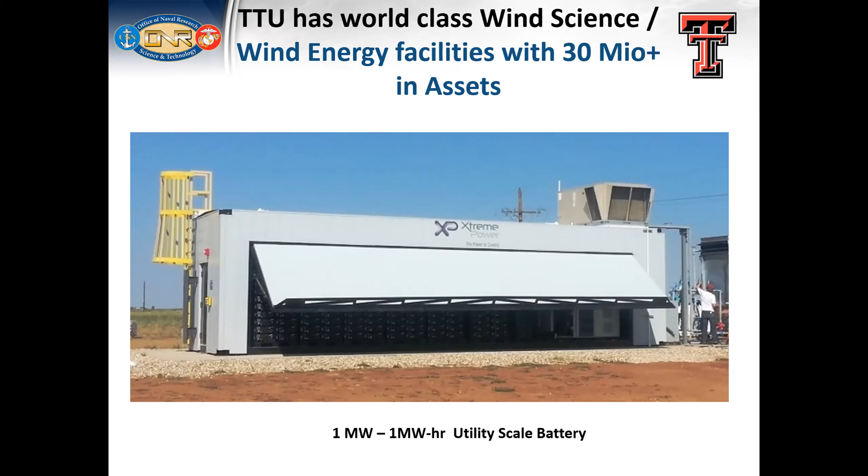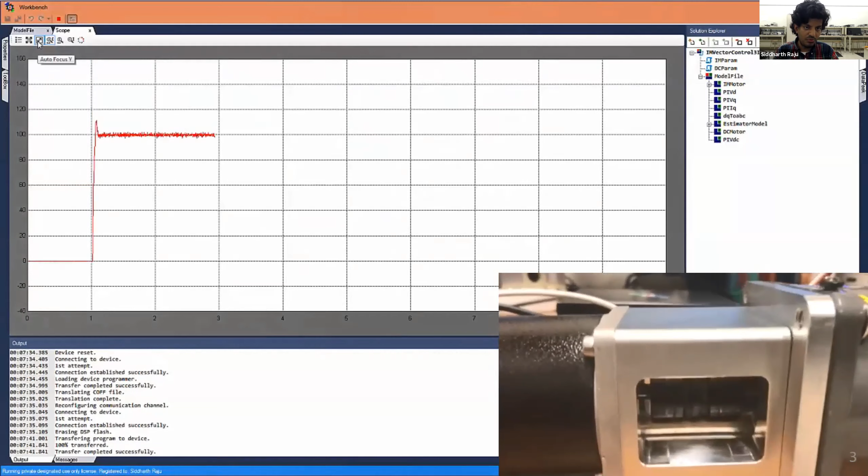So what we plan to achieve at the end of this session is basically to do something like this. Here we have an induction motor model, and we are going to understand the concept behind running an induction motor in vector control, where the speed of the motor remains constant even when a load torque is applied to it.

As you can see here, I apply a load torque and the speed still remains constant at the desired 100 radians per second. So at the end of the session, this is what we want to achieve.

We'll start out doing this for a DC motor, then extend it to an induction motor, and then take it from there to a PMSM motor.

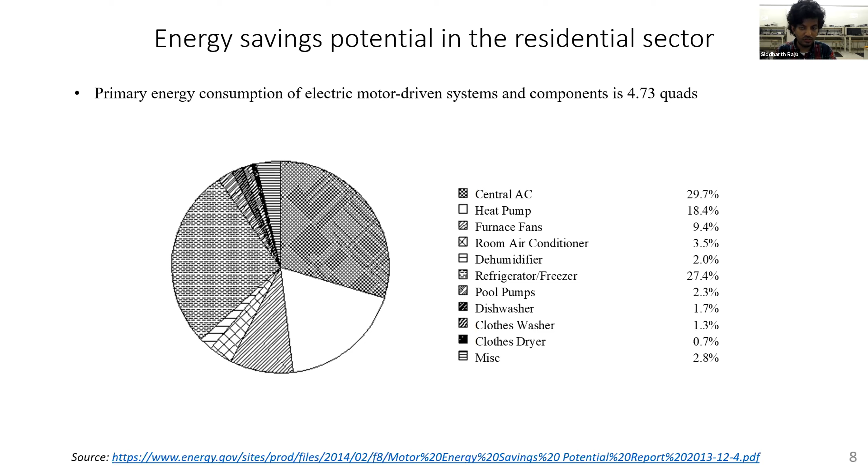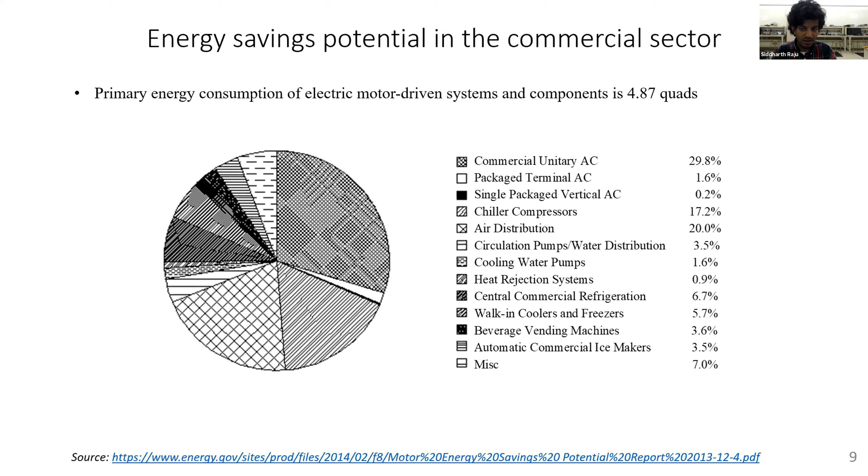Here's a breakdown on the commercial end. Again, most of the expenditure is on air conditioning in the commercial sector. So even a minor reduction in power consumption by using more efficient drives could save a significant amount of energy.

Here are some numbers for how much energy can be saved. If we were to do motor upgrades, going from line driven to electric drives based, as well as making these electric drives more energy efficient, the total energy saved would be about 4% of the energy generated. That's a significant amount of energy saving achievable just by upgrading drives.

There's more motivation to going to drives other than just energy saving. One of the primary motivations is to do precise control—this could be position control, speed control, or torque control—and each of these has its own application.

You would have position control applications in robotic assembly plants, like a car assembly plant, where you want to move a robotic arm from one position to another and then fix some screws and such. You'd have places where you want torque control, like a conveyor belt, where you have some load being added and want to keep propelling it at a constant level of torque, or even in an electric car, where you'd have torque control at lower speeds.

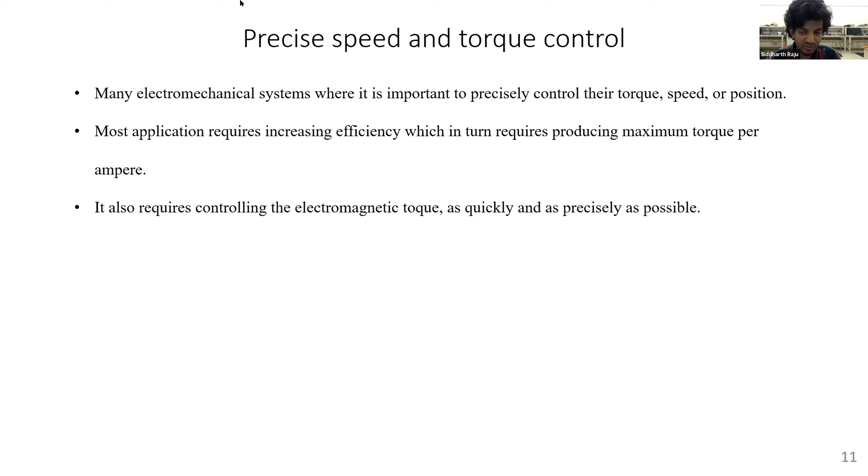Also, if you have more torque, it means you can control your system at a faster rate. For the most part you'll drive your drive at the rated flux condition, so that you can do precise speed control at very fast pace. All of this is dependent on having increased efficiency in your drive.

So what are we trying to achieve by using a drive and speed control? Say you have a conveyor belt and some weight drops on it. Irrespective of what drops on the conveyor belt, you want it to go at a constant speed. At time 0, you add a load, and you want the speed to remain constant. This is the idealized scenario where speed stays constant irrespective of the load applied. In a practical system, the speed would dip a little, but if your controller design is good enough, the speed should catch up and settle back to the desired speed. We try to narrow down the band in which the speed dips

by using a faster and faster response. But this comes at a cost — it would require a higher transient current. We'll look at it in detail as we go, but the ideal response is that you want the speed to remain constant irrespective of what load torque is added to the system.

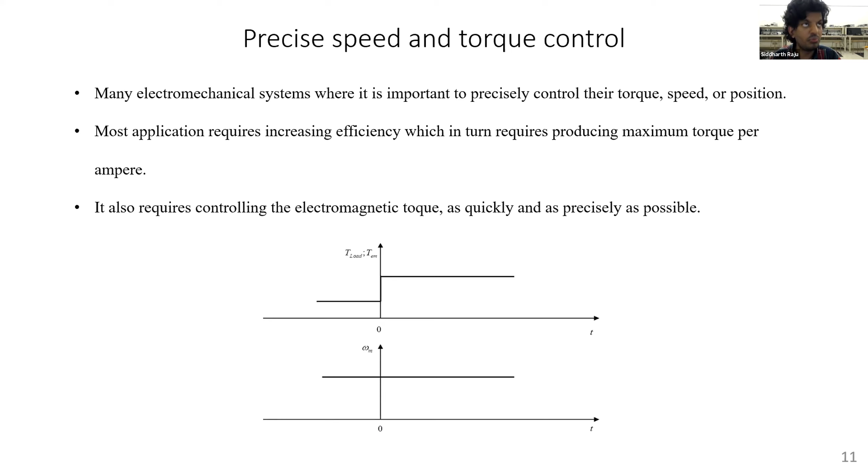Adding this power electronic unit allows us to control what voltage comes out at the output. And that in turn allows us to control the speed of the motor, the position of the motor, or the torque generated by the motor.

There are two basic converters we use to achieve this. In a DC converter, we use a full bridge converter with two legs. Using these two legs, you can make the output voltage go to positive DC bus, 0, or negative DC bus — three combinations. If switch A is connected to the top DC bus and switch B is connected to the bottom DC bus, you get plus VDC. If A is connected to the bottom and B is connected to the top, you get negative VDC. If A and B are both connected to the top, or both connected to the bottom, you get 0 at the output voltage. So those are the three output voltages you can generate.

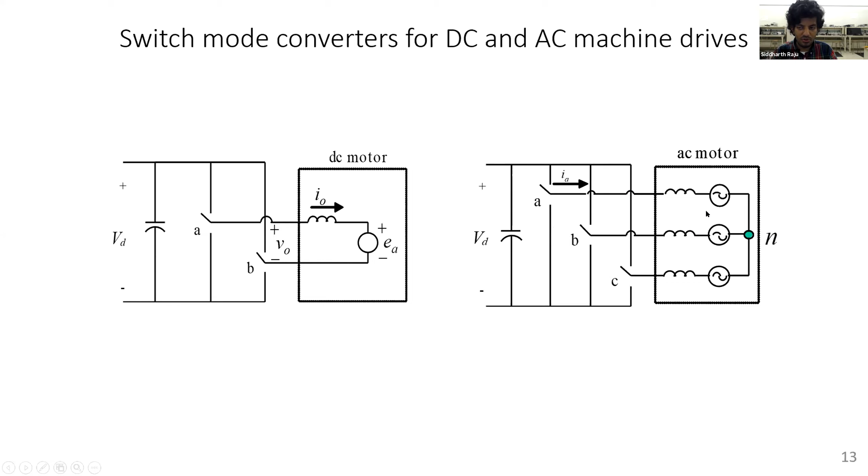Okay, so let's just look at one leg of a converter. You have DC bus voltage, and you control the amount of time the switch is on and off to control the output voltage. So the output voltage at this point is going to be a switched voltage — it's going to be on and off, so it'll be VDC and 0, VDC and 0.

And at the output, if you connect a system equivalent to a low pass filter, 1 by SL plus R, that has a time constant much higher than the switching frequency, then it's just going to see the average voltage rather than the switching voltage. That's what we're trying to achieve by using a power converter — we switch at a very high frequency so the motor only sees the average response, because its time constant is much higher than the switching frequency time constant.

If the control voltage is greater than the triangle, the output is turned on. If the control voltage is lesser than the triangle waveform, the output voltage is turned off. If you look at the average of this on-off waveform, that's your desired output voltage. So you adjust the control voltage to the desired value so that your output voltage average represents whatever is required.

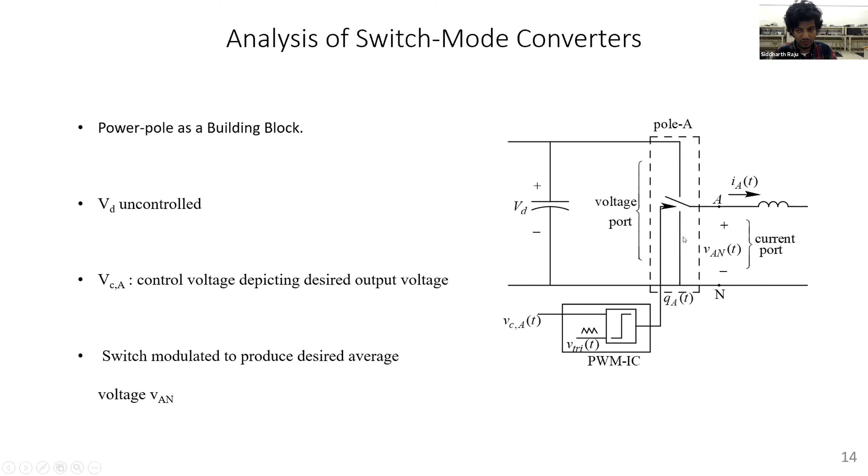From 0 to plus VDC, because we're just using one single leg in this example. So you can have either maximum VDC or 0, in case this is connected to the bottom leg. So with only unipolar voltage, you can control only one direction of a motor.

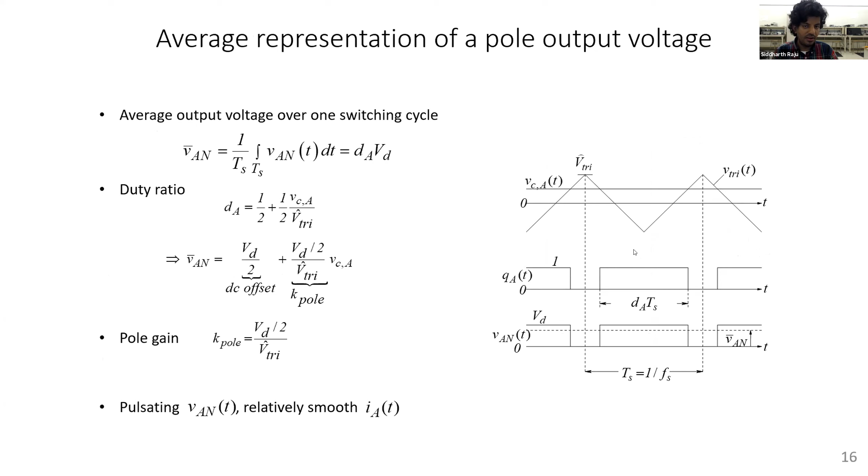So if you have a DC motor and your voltage goes from 0 to say 40 volts, your speed is going to go from 0 to 200 radians per second. To be able to get negative speed as well, or while using positive speed to get braking, you need to apply negative voltage or voltage lower than the back EMF, in which case you need bipolar legs. That's what we achieve here.

So you use 2 legs of an inverter rather than a single leg to get bipolar output voltage. As I mentioned earlier, if you connect the top switch to the positive DC bus and the bottom switch to the negative DC bus, you would get an output voltage of VDC.

And if you flip it around and connect the A phase switch to the bottom leg and the B phase switch to the top leg, you'll get minus VDC. So you get bipolar output voltage.

Similar to the previous case, by modulating this, you'll be able to get different voltages between plus VDC and minus VDC, and the algorithm to do this is shown here. This is a pretty easy derivation, it's not even a derivation, it's just obvious. But if you want more details, you can look at the material on the CUSP website.

The same can be extended to 3-phase sine PWM. You again have the same VDC by 2, and in this case you're looking at it as duty, so it's 0.5. Then you have the control voltage, VC times sine of omega t in phase A, VC times sine of omega t minus 120 degrees in phase B, and minus 240 degrees in phase C. The duty ratio is just varied sinusoidally, phase shifted by 120 degrees, to get the output of the 3-phase inverter.

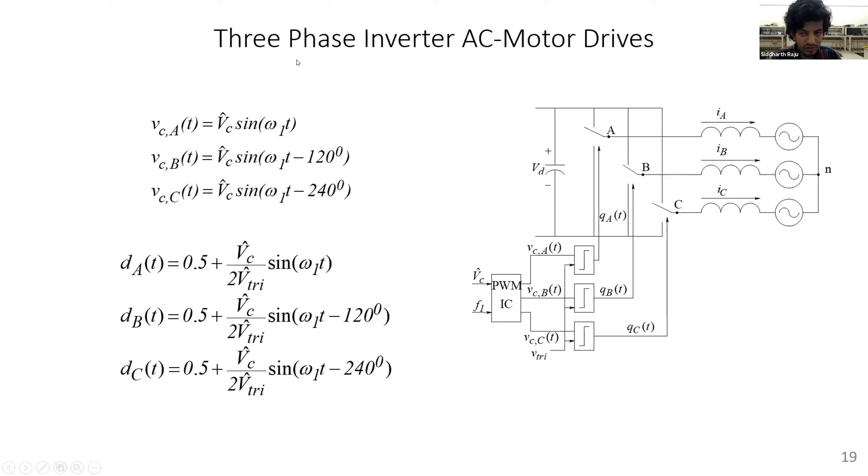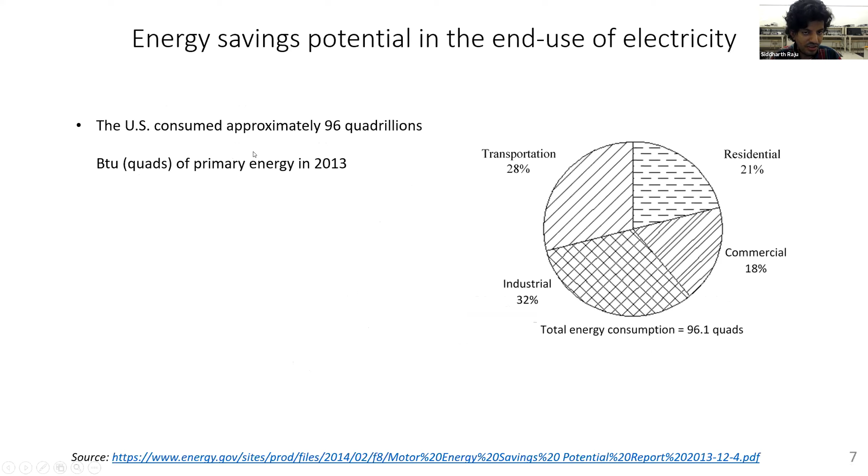This is the overview of the AC 3-phase inverter and the single-phase inverter that we saw. This is one of the first topics covered in part 1 of the advanced electric drives course, so we skipped over the electromagnetics concepts, which is also covered in the course. We looked at the basics of switch mode power electronics, though I just glossed over most of the topic. Now we'll look into the control of electric drives, basically the DC motor drive, in a bit more detail than we did the power electronics.

In a DC motor, it's aligned such that they're always at 90 degrees, which is the point of maximum torque production. By adjusting the applied voltage, you can adjust the magnitude of the flux produced by the electromagnet in the rotor. So adjusting the voltage adjusts the current, which adjusts the flux, which adjusts the magnetic strength of the electromagnet. It's basically two magnets interacting with one another to produce torque.

From an equation point of view, the torque of the DC motor is a function of some kT, which depends on the strength of your stator magnet, times the applied armature current. This kT is just a function of motor design, and we won't worry about the values, for us it's just a constant. So your torque is directly proportional to your current, and your back EMF is going to be proportional to your speed.

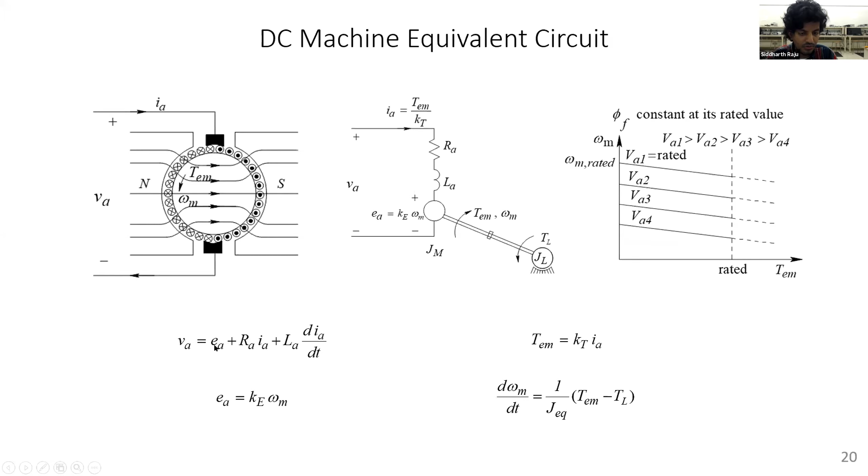The final equation that ties them all together is the relationship between your speed and your torque. The problem with the DC motor is that as you change the applied load, the speed of the motor keeps dropping. The reason is that as I keep increasing the load torque, your current increases, and as your current keeps increasing, your back EMF drops because you have a constant voltage and there's more and more drop across the resistor. That means the back EMF gets reduced, which means your speed drops down.

So let us look at this using a simulation, and do the same thing in hardware as well, just to get an understanding of what happens. These are all part of experiments available on the CUSP website that goes through each and every experiment.

So if you go to resources and basic drives, all of these experiments go through each and every one of them. Here you have motor control where you estimate parameters. The previous experiment is characterization of the DC motor where you estimate the KE, KT, and other parameters, the R, LA, J. Once we have these parameters estimated, we can do speed control as we'll see in this experiment.

Let's go ahead and open and first do a simulation of this model that we just saw. This is very simple: we have an applied voltage minus the back EMF, and then we divide it by 1 over SL plus R, which is the transfer function, RA and LA.

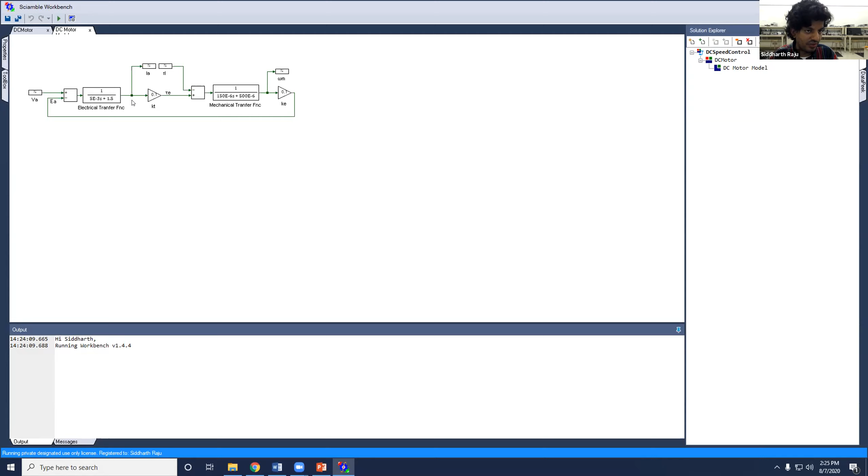So I'm subtracting the applied voltage minus the back EMF. That should give me the drop across the armature inductance and resistance. If I do the 1 by SL plus R, whatever comes as the output is your armature current. And if I scale the armature current by the torque constant, I get the electromagnetic torque.

The electromagnetic torque minus the load torque divided by 1 by SJ plus B gives this transfer function. Here I'm just showing the equation for inertia, and if I add the frictional component, it becomes 1 by SJ plus B. The output of that would be the mechanical speed. If I scale the mechanical speed by the back EMF constant Ke, which equals Kt in SI units, I get the back EMF, and I use that to close the loop. So it's just two transfer functions and a bunch of gain blocks, and I've completed the DC motor model.

Let's go ahead and simulate this model. Before I simulate, at time 0.1 second, I give a step voltage of 10 volts. After that, I start increasing the applied load torque at every second by 0.05 Newton meter, or about 50 millinewton meters. This is a really small lab motor. I'll show you the setup in a couple of minutes. Let's go ahead and simulate the system.

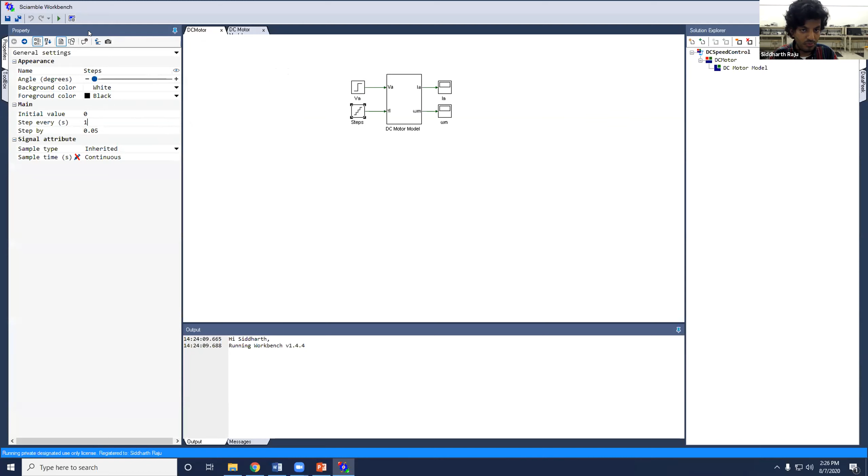At time 0, the speed is close to about 93, around 100 radians per second, because I'm applying 10 volts and your Ke is 0.1. So 10 by 0.1 should be about 100, and accounting for stator drop, it should be a little bit less than 100, and that's what we see here.

At 1 second, I apply 50 millinewton meter and you see the speed drops. Then at the next second, I apply 100 millinewton meter and the speed drops even further, and it keeps dropping linearly for every step, as we see here as well. As the load torque is increased, the speed of the motor keeps dropping.

This becomes a problem if you have, say, an elevator with one person versus ten people in it. If it goes extremely slow at full load and extremely fast with one person standing there, that becomes a problem. Or in a conveyor belt, or a fan, or a motor mixing some liquid, as the viscosity increases, the speed should not change. So if those are the constraints, this kind of open loop speed control, where you just apply some voltage and assume the speed stays constant, becomes problematic.

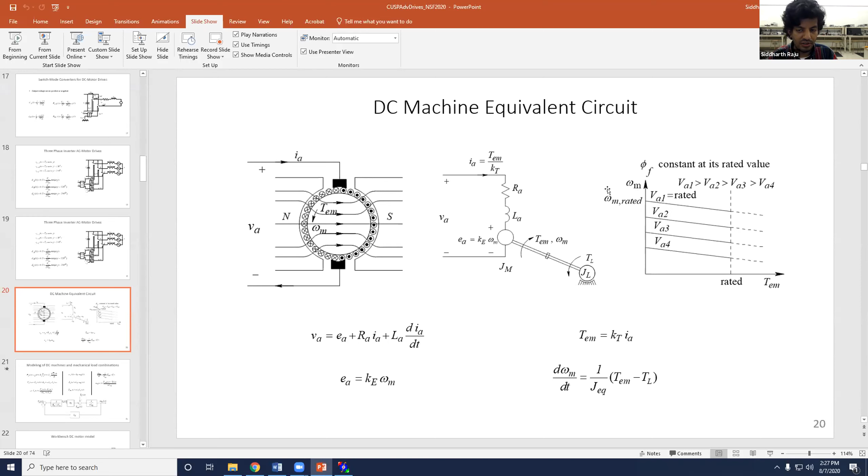So what we want to do is keep the speed constant even though the load keeps changing. But this was just simulation, so let's verify if this is what happens in reality as well. Let's go to DC motor real-time speed control, and let me switch over the video.

My webcam now shows the hardware setup. We have a DC motor on the right, and a DC generator on the left, or a DC motor which basically just acts like a load to emulate a load. The first DC motor, again, I'm setting it at 10 volts. I'm going to run it for some time, and then start adding load to it, and you'll see the speed drop in real time.

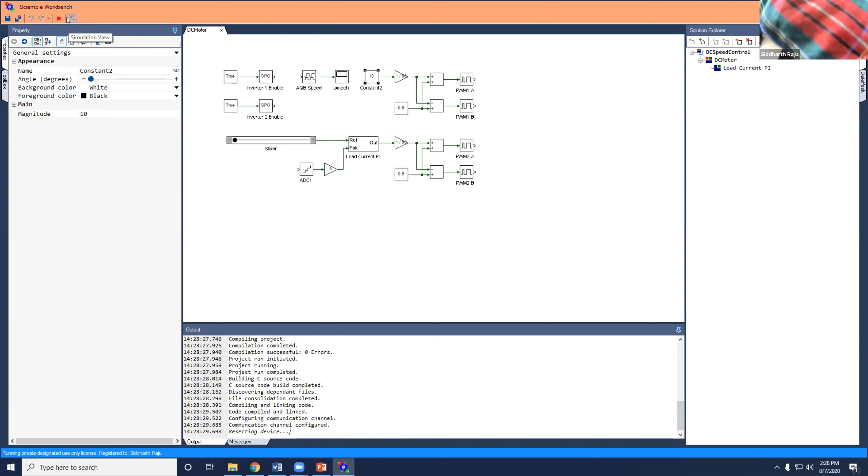Okay, so let's go to real time mode, and let's turn on the power supply.

So the speed is settling at around 90, and it's remaining there. Now let me add a load, and you see the speed just dropped. Let me add one more load step, and the speed drops even further. Let me add 2 more load steps, and you can see the speed drops even further. This is very similar to what we observed in simulation.

Okay, and if I reduce the load, it should go back up again. And if I make it all the way to 0, it should go back to the original speed. So let's stop this.

Okay, so as you can see, the speed keeps changing with the amount of load I applied, and the real-time results are exactly the same as what we got in simulation.

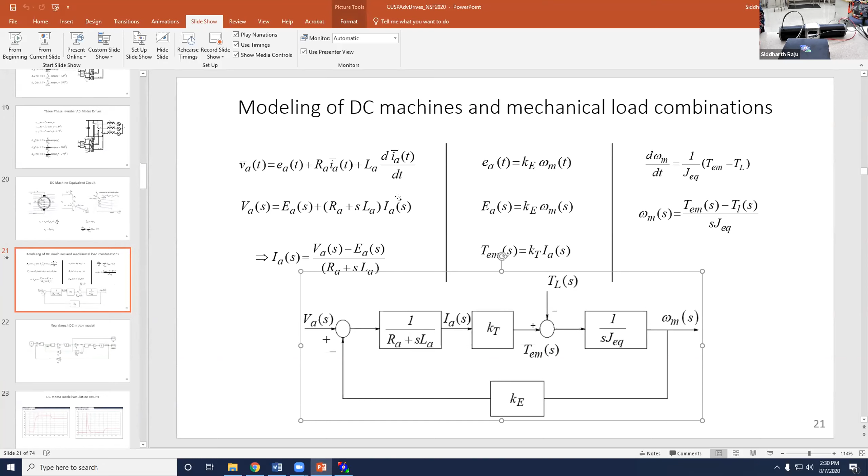So this is the motor model transfer function that I showed you in Workbench before. On the left, you have the electrical equations, electrical model. And on the right, you have the mechanical model equations. And these need to be tied together, and that is tied together by the back EMF and the torque equation.

So you can think of it in a motor as the rotor element, the mechanical aspect, and the stator element - sorry, in the DC motor, the rotor is where we control the power electronics. So the rotor is the electrical component, and you have the rotating component, the mechanical component, and you have those two coupled together by the back EMF and the torque equations. So the flux, the energy in the air gap, is basically what couples from electrical to mechanical.

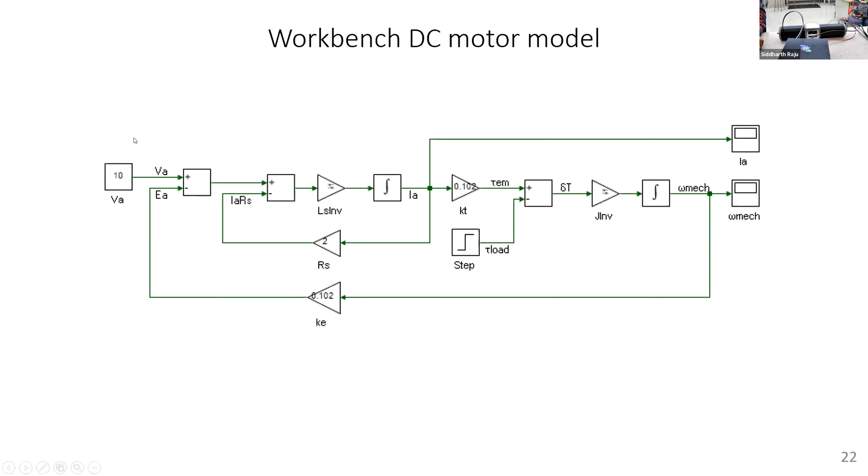So what we want to do is, this is the same model that I just showed you with the back EMF. So this is the electrical model 1 by SL plus R, and this is the 1 by SJ plus B. And this is the whole electrical and mechanical model we just simulated right now. And these are all the simulation results.

So what we want to be able to do is control the speed of the DC motor even when the load torque changes. To do that, we'll be using a PI controller. There are different controllers that are available, and the most simplest and easiest of them is the PI controller.

Even more simpler would be hysteretic, but that's not used in any practical application because of variable switching frequency, which causes a lot of noise issues and EMI issues. So the very minimal basic that we'll be using is a PI controller.

So the PI controller, what it does is if there is an error, say I want some particular speed, 100 radians per second, and the measured speed is say 90 radians per second, it'll take the difference between the two and see that the error is 10 radians per second. So it'll apply some proportional voltage, say 10 volts. And if the error becomes just 5 radians per second, it'll apply 5 volts. As the error keeps reducing, the applied voltage will keep reducing.

And if you just had a P controller alone without an integral component, when the desired speed is equal to the measured speed, the error will become 0. That means the applied voltage will also become 0, which means the speed will start to die down. So we need an integral component which can retain some voltage even when the error goes to 0. So you would need at minimum a proportional as well as an integral controller. So that's the overall control system of the PI controller that we'll be using.

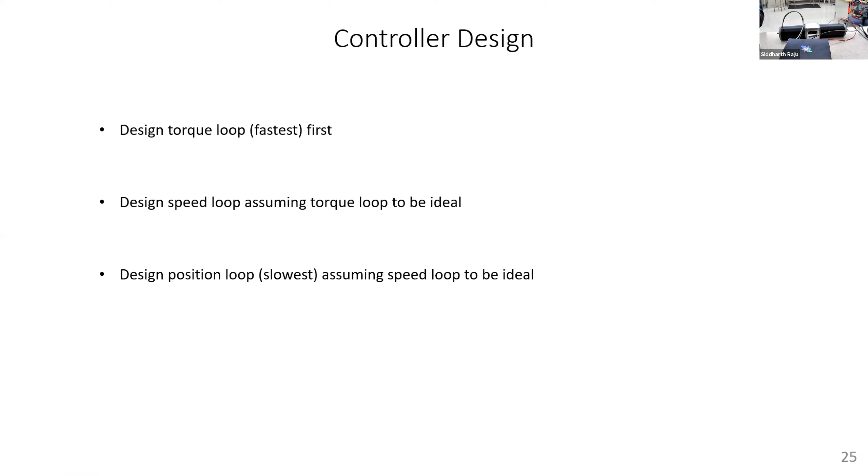You should note though that even with two loops, it does not mean you can control the current independently. It's just a transient control of the current, not the steady state control — steady state is controlled by the outer speed loop. If you want to do position control, you would add one more loop to the speed loop, where the transient speed you can control, but in steady state you can only control the position, not the speed.

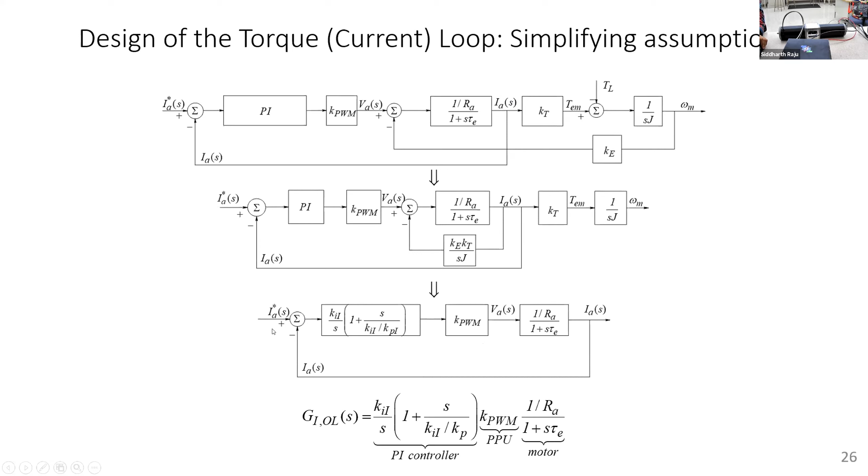So here is the overall structure. I won't go into too much detail since we're running out of time. We have a reference current, and we measure the current, and we have a PI controller which controls the applied voltage so that the measured current equals the reference current. This is the overall transfer function of the system, which can be reduced further and further by just moving these blocks around to the simplified form — the overall transfer function we'd like to tune the KP and KI values for.

So this is a first order system, 1 over sL plus R — just a basic first order system. With a PI controller, you can adjust the phase margin and gain margin of the system to adjust the stability. Usually you would have a phase margin of about 60 degrees.

This is the point where you have just a little bit of underdamped response with a zeta factor around 1 over root 2, which is very close to the ideal value where you'd have minimal error — a minimum squared error function. Basically that means you'd use the minimum amount of energy required to take it from point A to point B of the desired speed or desired current.

So that's the reason we picked this particular phase margin. It could be other values too — 60 degrees might not always be applicable. Say in case of a robotic assembly system, you'd want a higher phase margin because you want your system to be more overdamped, since you don't want your arm swinging around. But if you have an elevator system, if the speed swings a little bit here and there, that's fine — a couple of RPMs — as long as it achieves that speed at the desired time, that should be good enough.

So depending on the application, the phase margin and gain margin you choose would be different, but 60 degrees gets you close to the point of minimal energy required to take it from point A to point B. The open loop bandwidth you'd choose for the PI controller would be at most 1 by 10th of the switching frequency. So if my inverter is switching at say 10 kilohertz, I would design the loop bandwidth to be about 1 kilohertz.

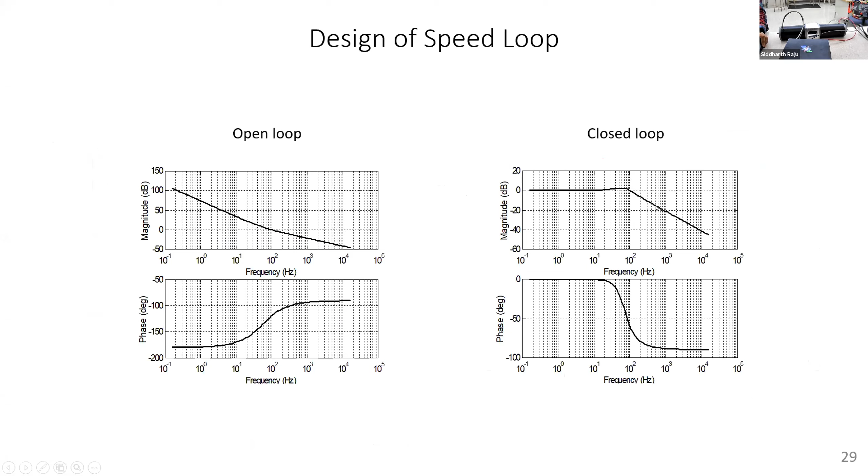So this is the PI controller design. Again, in the closed loop and open loop — without the PI controller and with the PI controller — in closed loop you'd want it to be similar to a first order system, 20 dB per decade.

Okay, so let's go ahead and simulate the system with the PI controller on with the motor model.

Okay, DC motor speed control. So here we have the DC motor model. We have a current control, an inner current controller which is just a simple PI controller, and then an outer speed controller. So let's run the simulation.

As you can see in the simulation, at time 0.1 second, I step a reference speed of 100 radians per second, and it goes to that 100 radians per second as desired. After that, when I apply a load torque of 0.2 Newton meter at 0.6 seconds, the speed drops a little bit, but the controller recovers and pushes back to the desired speed. So this is the simulation.

So this is all achieved by the PI controller. You have an outer speed loop and an inner current loop. This inner current loop is just to limit the maximum current. It can only affect the transient response. You cannot control the steady state current in any way because you have only one control variable.

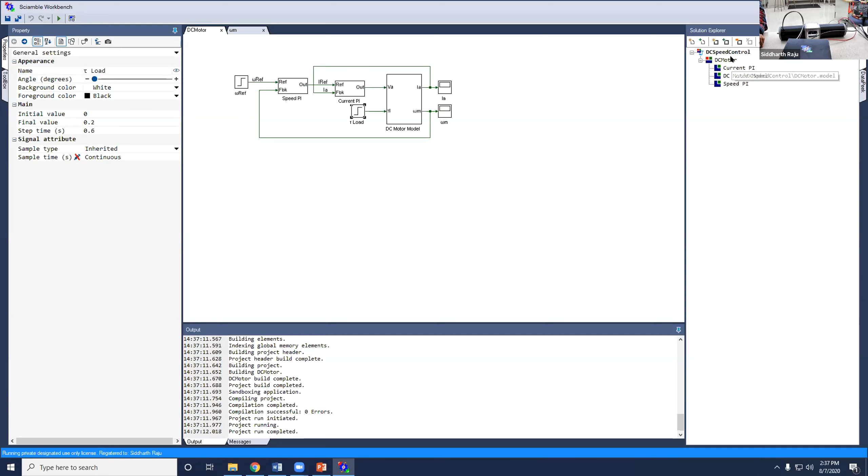Okay, let's do the same thing in real time as well. So as you can see, this is the same system setup. You have a DC motor, but here instead of just doing open loop, you have a closed loop speed controller. And then the bottom is the same.

I'm going to vary the load torque in steps, and see that the speed remains constant. Okay, let's go ahead and run it.

Oops, sorry, I forgot to turn on the power supply. Okay, let's run it again.

Okay, so as you can see, the speed is at 100 radians per second. We'll zoom in and look at the transient response once we stop it.

So let me apply a load torque of 0.05 Newton meter, and you can see the speed dips a little bit, but it's again still the same. Let me apply, say, double the load step. You can see again the speed dips a lot, but it recovers pretty fast.

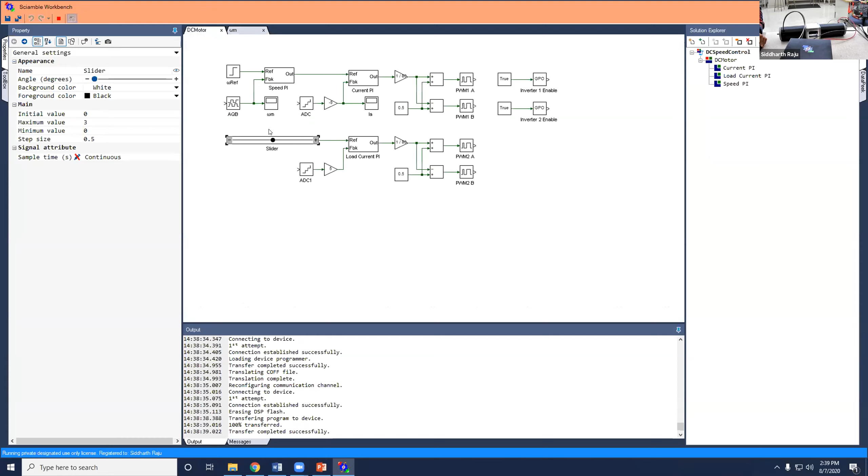And let me apply full load, and you can see, oh, I've reached the overcurrent limit at that value, so the speed is going to go down. But just before the overcurrent limit, if I bring it back up again, you can see the speed remains constant.

So irrespective of what step I apply, as long as I don't exceed the current limit, I should be fine. The inverter will be able to generate the desired current. So as you can see, the speed always remains constant irrespective of the step.

So at time 1 second, I apply the step reference, it goes to 100 and settles down at 100 and remains there. At every other step, as I keep applying load torque, the speed dips a little bit, but it recovers pretty quickly and settles back again. And again, this dip is because the inverter reached overcurrent and went into current limit, but otherwise this wouldn't have happened. Okay, so that is DC motor speed control.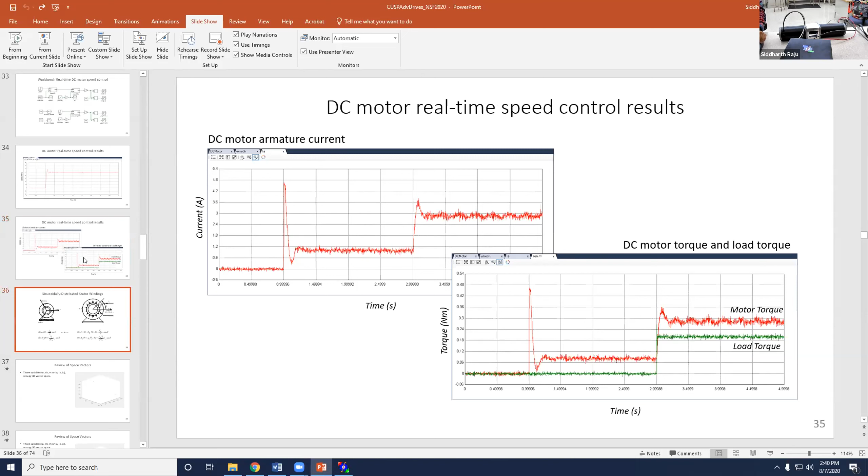So what we want to achieve in the next, remaining 20 minutes, this is all basically slides for whatever I showed you just now. What I want to go over is the structure of an AC machine, why use space vector, why use DQ, and look at induction motor vector control as quickly as possible.

Okay, so in an AC machine versus a DC machine, in a DC machine you just have windings that are distributed, a constant set of windings across the motor. In an AC machine, you have three sets of windings, phase shifted by 120 degrees, and their density varies as a sine of the angle.

So here I'm just showing the winding density of a phase alone. At angle 90 degrees, you have say 10 windings, and at say angle 30 degrees, you would have half of its sine of 30, so you would have 5 windings, 5 turns at 30 degrees. And at angle 0, you would have absolutely no windings. So you just keep reducing the number of turns depending on the angle at which the winding is.

Again, the details of it, Jim Hendershot will cover in the next session. I'll skip over it, but all you have to understand is that the windings are sinusoidally distributed, and you have 3 sets of windings.

Even though you have 3 sets of windings, that does not mean you have 3 independent voltages. That's because the neutral point of these 3 windings are tied together. So that means you have only 2 independent variables, because one of these 3 variables, VA, VB, VC, is always going to equal 0, since that equals the neutral point voltage, and that's floating and will be 0 as long as these are balanced. That enables us to transform these from 3 variables to 2 variables.

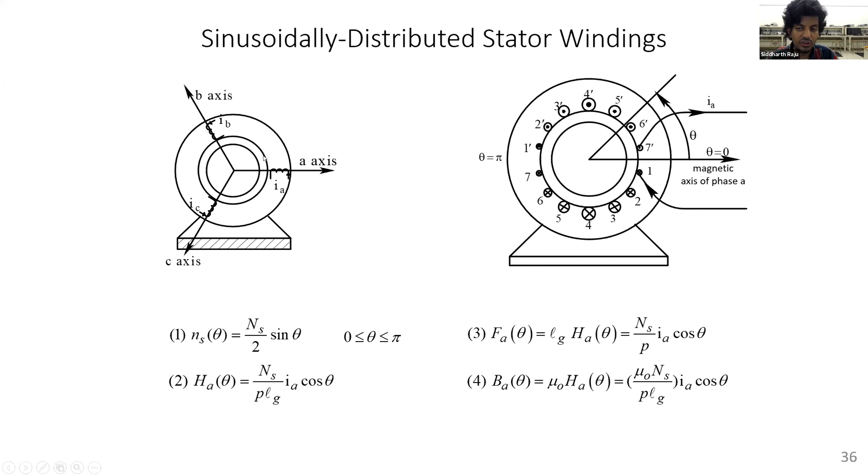Now say I limit it by saying it's a balanced system and the sum of the 3 phase quantities is 0. If I plot with this constraint, VA plus VB plus VC equal to 0, or IA plus IB plus IC equal to 0, it becomes only 2 independent variables, because the other can be expressed as, say, VA as the sum of VB and VC, or IA as the sum of IB and IC. So there are only 2 independent variables. That means if I plot this, it occupies just a plane rather than a 3D space. So this becomes the equation of a plane, the sum of the 3 equal to 0.

What space vector does is just a rotational 3D transformation that converts a 3D system into a 2D system, because all of these points lie on a plane. So that's all ABC to DQ, or ABC to alpha-beta transformation, or space vector transformation, does. It converts a 3-phase AC system into a 2-phase AC system.

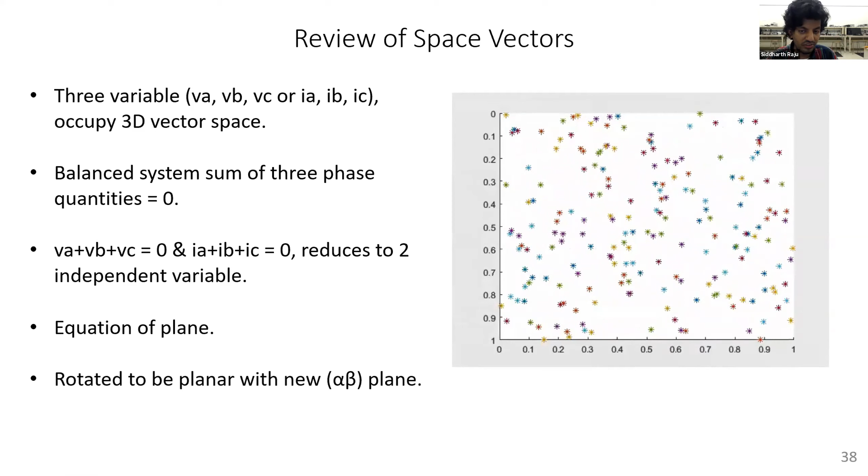The transformation rotation matrix is given here: VA space vector is VA times e to the power j 0, VB times e to the power j 2 pi by 3, and VC times e to the power j 4 pi by 3. Similarly, every other vector can be converted using this. e to the power j is just cos of 0, sine of 0, cos of 120, sine of 120, cos of 240, sine of 240. This is something everyone familiar with rotational transformation must recognize.

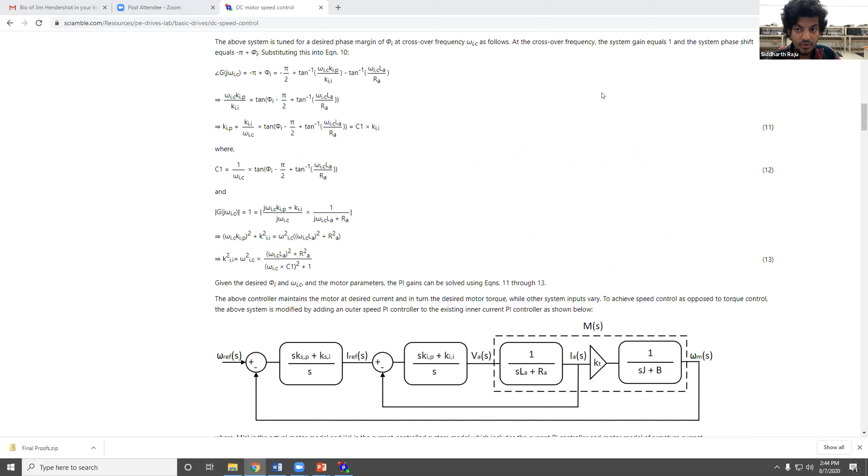So now we have reduced the 3-phase system into a 2-phase system. It's still AC though. We have 3-phase sinusoidal wave voltages, and we've converted them into 2-phase sinusoidal voltages, shifted by 90 degrees. That's all space vector did, and it is still AC. If we want to do DC motor kind of control, we still need to convert it into DC quantities. But before we do that, we need to understand what these AC quantities are.

Let's start with the flux linkage equation. The flux linkage of the stator phase equals the current flowing in the stator phase times the leakage component, plus the flux linkage mutual coupling between the A phase and the B phase, and A phase and the C phase, and similarly for each. This is the case when the rotor is not present.

Similarly, when the rotor flux linkage is rotating, when the rotor is rotating, you have an e to the power j theta component as well. That's because when the stator and rotor are aligned together, the A phase flux linkage couples to the A phase at 0 degrees and couples to the B phase at 120 degrees. But if this rotor itself starts rotating, the coupling starts changing. That's what is reflected by this e to the power j theta term.

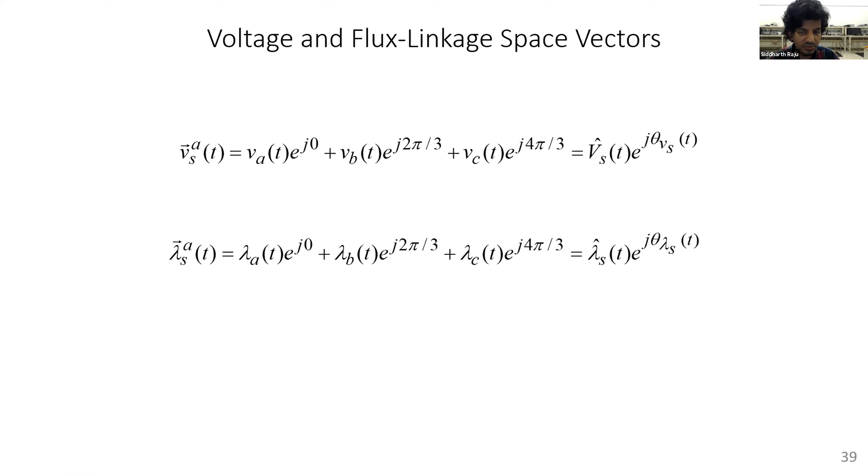So to eliminate this, it'll be nice if we go to a frame in which our conversion frame itself is rotating. So here, when we went from ABC to alpha-beta, we had a frame which is static, and we are just projecting 3 components to 2 components because there were 2 independent variables, not 3. But instead of having a static frame, if our frame of conversion itself is rotating, your AC components will become DC components, and all that we used in DC motor control can be used in AC motor control as well. So that's the reason why we go from ABC to DQ.

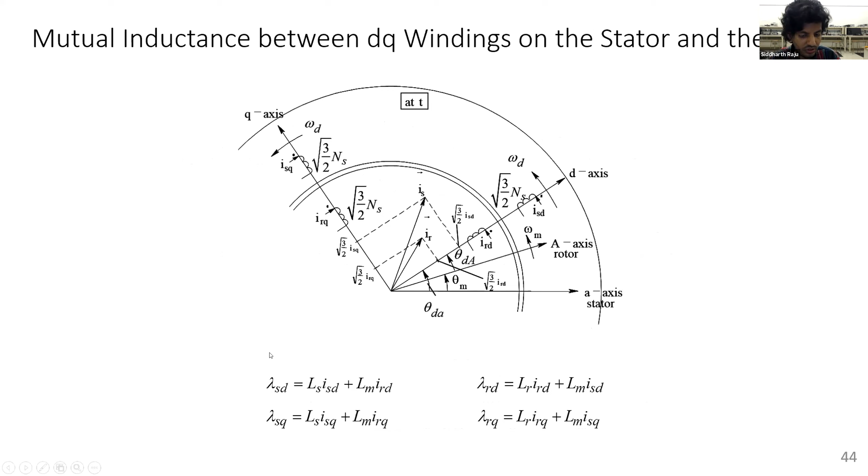And to be able to do that, once we go from ABC to DQ, in the flux linkage we had the theta component. The theta component disappears - it is just products of some constant times ISD, IRD, IRQ, and these are all DC quantities with some transient. So these are all DC quantities, and all of it can now be tuned with a PI controller similar to how we did before.

So the transformation matrix to go from ABC to DQ is very straightforward. You have cos of 0, cos of 2 pi by 3, cos of 4 pi by 3, and sine of 0, sine of 2 pi by 3, sine of 4 pi by 3, similar to ABC to space vector. And then you add it, and you do this transformation in a rotational frame instead of a static frame, so you have the theta component as well here. And that would make all of these AC quantities into DC quantities. So we started with 3-phase AC quantities, and we are ending up with 2-phase DC quantities in our control system.

And this is the equation at the end of the day. You have D voltage, which is Rs times IsD plus d lambda by dt. And you have an omega D component because of the rotational component present - this is the cross coupling term. When we design a PI controller, we will ignore the cross coupling term and then do compensation later. So all we are worried about is the Rs term and the d by dt lambda term.

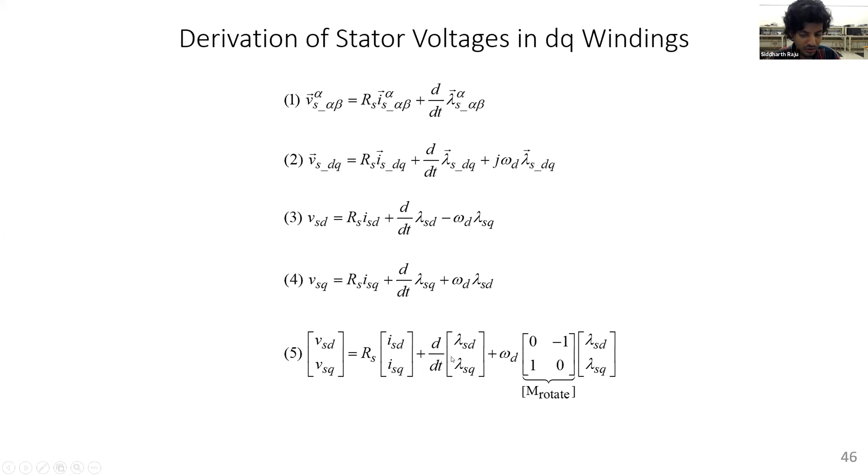This is very similar to what we had with the DC motor, where we had V equal to R times Ia plus d by dt of Ia times L. There we used L instead of lambda because our L was fixed. Here also L is fixed, so you can just put L, Is, and Lm, Is as well here. And similarly, you'll have rotor equations as well - again, those are very similar to the DC motor model we just saw.

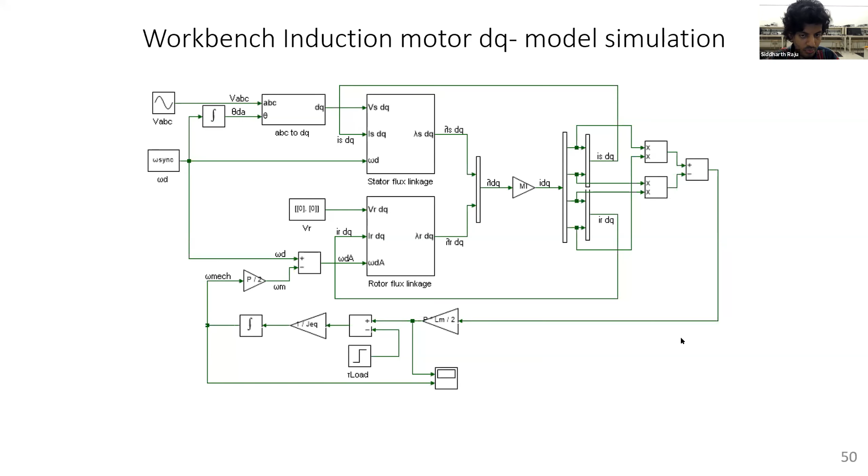And again, I'll skip over all of these - it's just the DC motor model that whatever equations we had before, we are just modeling using Workbench or Simulink. All of those examples are available on the CUSP website that you can download and do yourself. Okay, so let's go to the interesting part where we want to be able to control the induction motor speed. Let me open the simulation model and explain it from there.

So let's go to the induction motor simulation. Okay, here we have the induction motor model. All of it is modeled in DQ using the equations that I just showed you.

Previously we had just two PI controllers - one inner current control and one outer speed control for a DC motor. We have the same structure here. In addition, we'll have one more loop which can control the applied flux as well, because you have two control variables in case of an AC motor - you can control the flux as well as the speed. In a DC motor, you can't control the flux because that's basically a permanent magnet, or if you had an auxiliary winding, that would control the flux, and the primary winding can't control the flux in any form. But in an AC motor, you'll be able to control the flux. Even in a PMAC where you have a permanent magnet, you'll still be able to adjust, weaken, or add on to the flux by using the additional loop.

Okay, so let's go ahead and simulate the system.

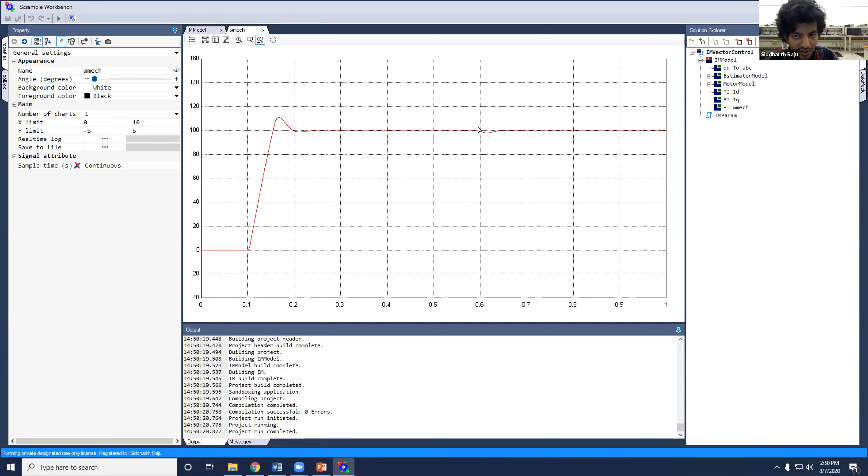So as you can see, we have exactly the same response as we would have with a DC motor. At 0.1 second, you apply a step reference speed and the speed goes up. And at 0.6 second, you apply a load torque and the load speed dips a little bit and settles back again. So we have achieved what we set out: we wanted the speed response of an induction motor to be exactly the same as a DC motor in closed loop control, where if there is a step load change in torque, the speed will still remain constant. And this is the ID-IQ.

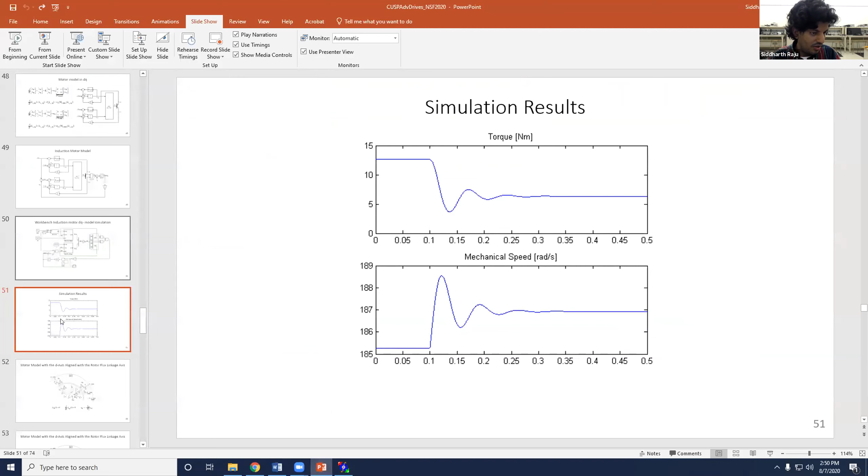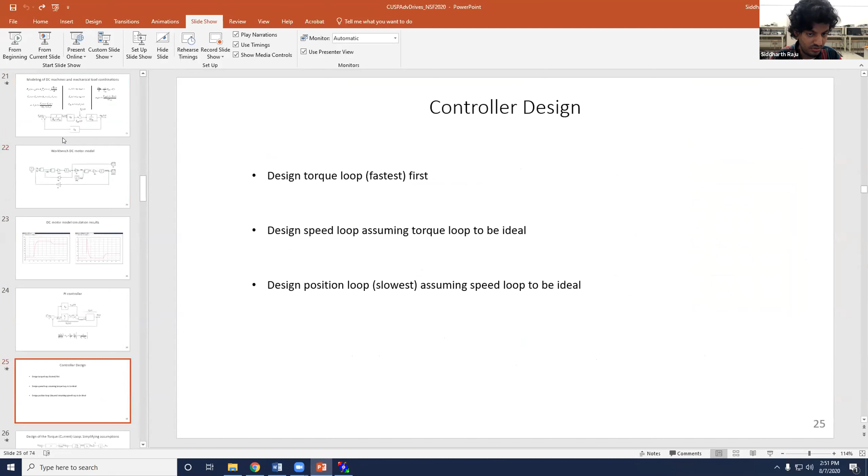So the IQ current controls your torque. Let's look at the IQ current. So if you look at the DC motor current that we got...

And the ID current is always maintained constant. You can change it, but in this case we maintain it as a constant at rated flux so that it maintains rated flux and the response is very fast. If you had lower than rated flux, the response is going to be a little bit slower. So that is the simulation.

Now let's go ahead and run the same thing in hardware.

Induction motor real-time vector control. Okay, let me change over the view... so this is the hardware mode. Let me switch it for an induction motor.

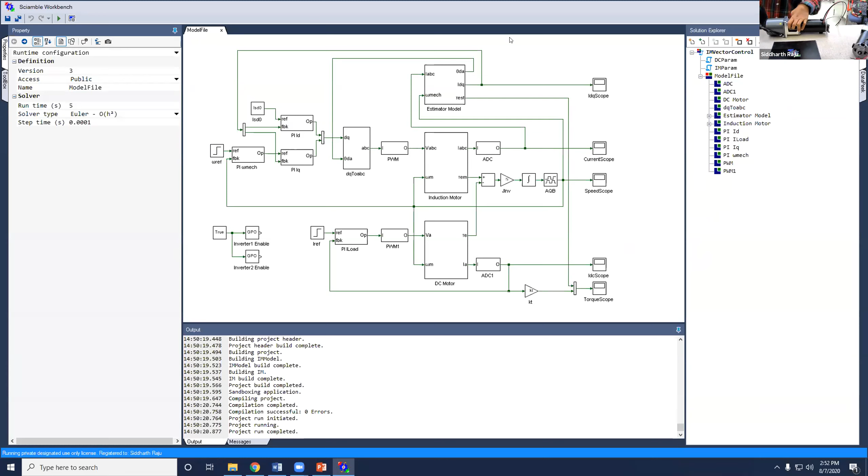So here we have an induction motor setup. And the inverter that I'm showing you is—there was a hardware session, the hardware labs demonstration session at 12 o'clock. You can probably check that out again if you haven't seen it, to get more detail about the inverter and the motor setup.

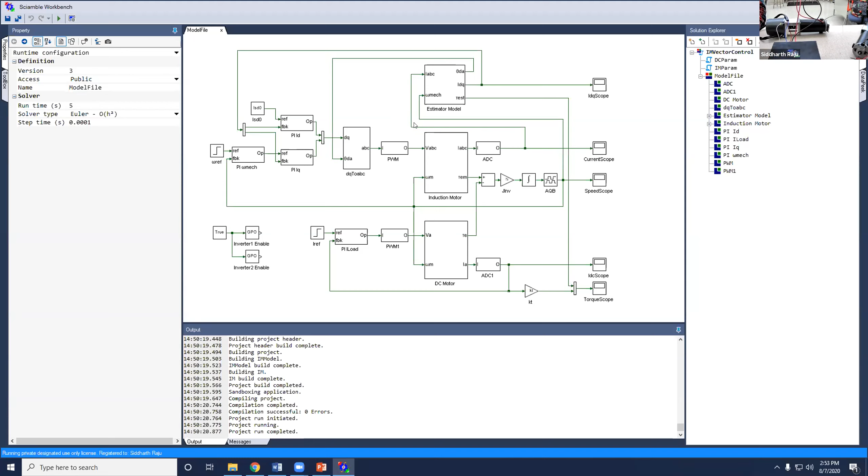So we have 3 inverters here. We are using only 2 of those. One is controlling the load torque, another is the DC motor, and the other is the induction motor, which we are going to be doing vector control on right now. And this is the vector control model in real time. So you have an induction motor model. Once I go to real time, this model is going to disappear because you have an actual motor, and you have all the PI controllers and stuff similar to what we saw in simulation.

So let's go ahead and run this, and hopefully the speed should go and settle down to the desired value, even when we add a load torque.

So this is the result from the actual system running. Oh, let me see here—I need to connect the USB. You should be able to see the motor spinning here. I forgot to connect the encoder; I just connected it, you should see the speed now. Got too many motors mixed up, wrong encoder.

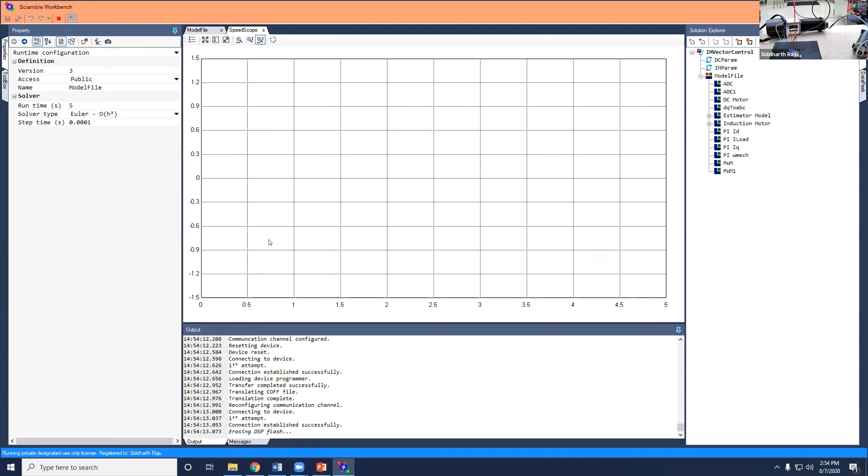There we go. So as you can see, at 1 second, I apply a reference speed step. The speed goes to the reference speed, and at 3 seconds I apply a load torque. And as you can see, the motor speed remains constant with respect to the load torque being applied.

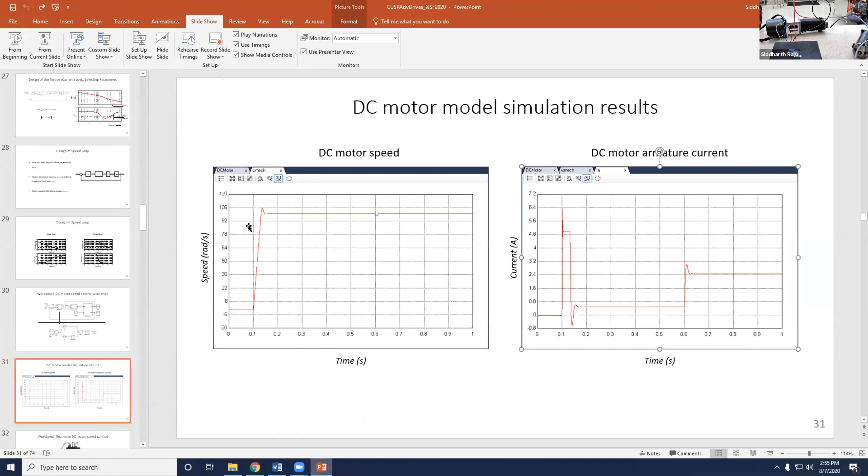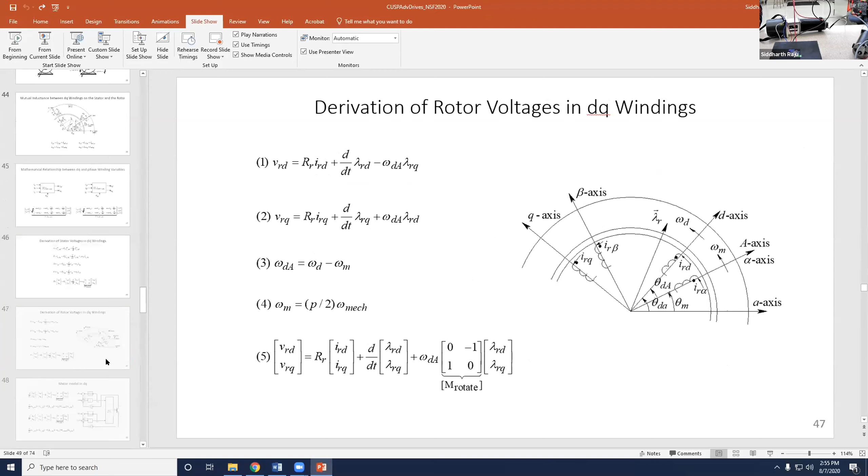So that's the experiment on induction motor vector control. We have a couple more minutes. We can look at induction... PMSM vector control as well, just to complete it.

A PMSM model is very similar to an induction motor model. In an induction motor, you add a rotor winding as well, but in PMSM there is no rotor winding - it's a fixed magnet, so there's no lambda RD component that needs to be computed. It's just a constant flux, lambda FD, that's the rotor flux, and we align it along the D axis, the rotor. Again, the reason for it is explained in Professor Mohan's course. You have a Q component, which is just a function of the applied stator current. So it's just a simpler model compared to induction motor vector control.

So let's switch over to the PMSM motor model and run that as well in hardware just for completion. Here is the PMSM vector control hardware. Again, I have a DC motor coupled to the PMSM to emulate a load, and then I have the PMSM here. We couple those three, and then let me connect the speed encoder.

Okay, so let's open up the last part. The equations are very similar to PMSM induction motor. Let's do the electric drives.

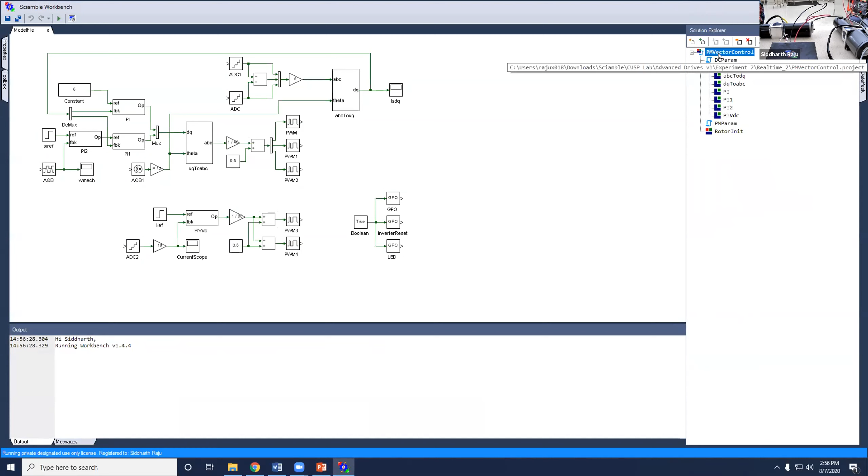The rotor position of a PMSM needs to be initialized because, as I mentioned earlier, the D axis is aligned with the rotor flux axis. Again, the reason is explained in Professor Mohan's book. So that's an initial step I need to do before I can run the PMSM in vector control. Once that is done, let me do it once more just to verify it.

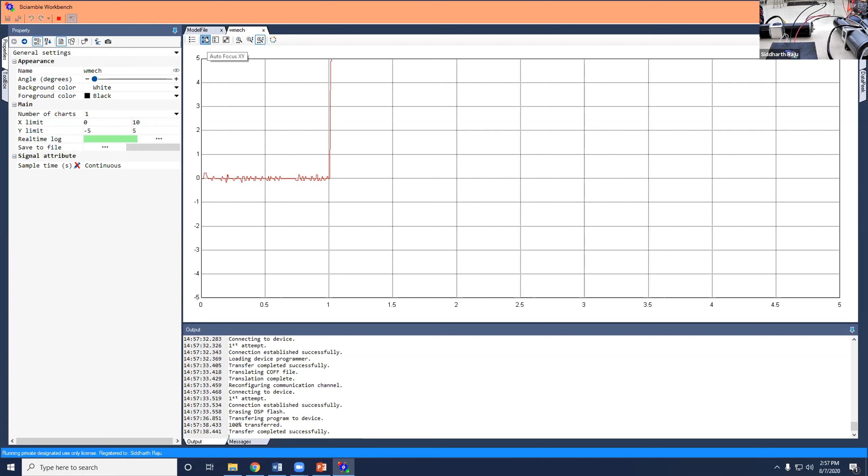Now we should be able to see PMSM speed go to 100, settle down, and with respect to the load torque being applied, it should remain there, hopefully. Okay, there we go. So we applied at 1 second some reference speed, it goes up and settles down, and at 3 seconds I applied a load torque. There's a small dip, but the speed remains constant.

So those are all the experiments covered, and there are a bunch more experiments as well - direct torque control and sensorless experiments - which I didn't go over, but those are available on the website that is linked online, as well as a link at the end of this presentation.

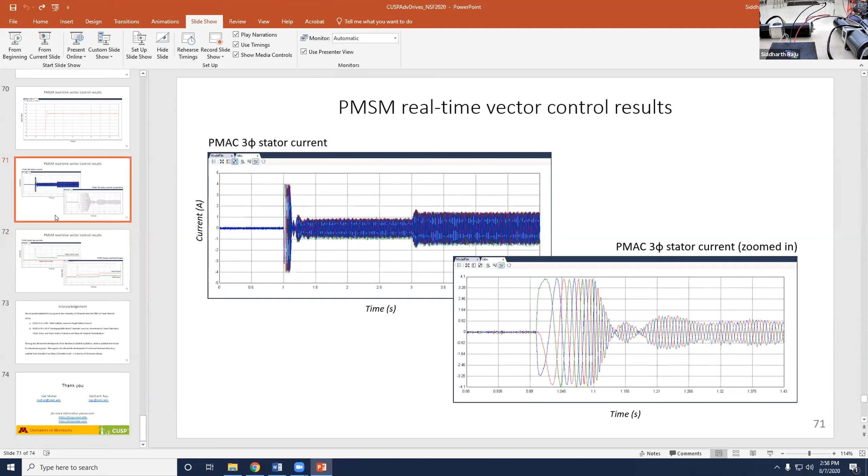That concludes this session on advanced electric drives. It's supposed to be a 1-semester course - originally a 3-semester course which we combined into one semester. Here I attempted to combine all of that into a 1-hour session. Hopefully I was able to transfer some element of information, and more detail, as I mentioned, is available both on the CUSP website as well as the Sciamble website.

Before I conclude this session and transfer control over to Jim Hendershot, who is going to have a session on motor design, I would like to acknowledge the Office of Naval Research, which has enabled us to develop all of these courses as well as the content for the new textbook available from Wiley. All of these labs were developed using ONR funding - the previous funding as well as the current funding for future labs.

We make these kits available at extremely low cost for everybody, irrespective of commercial use or educational use. The whole purpose is to make it available to as many people as possible at an extremely low cost. And the software, as I mentioned earlier, is absolutely free of cost.

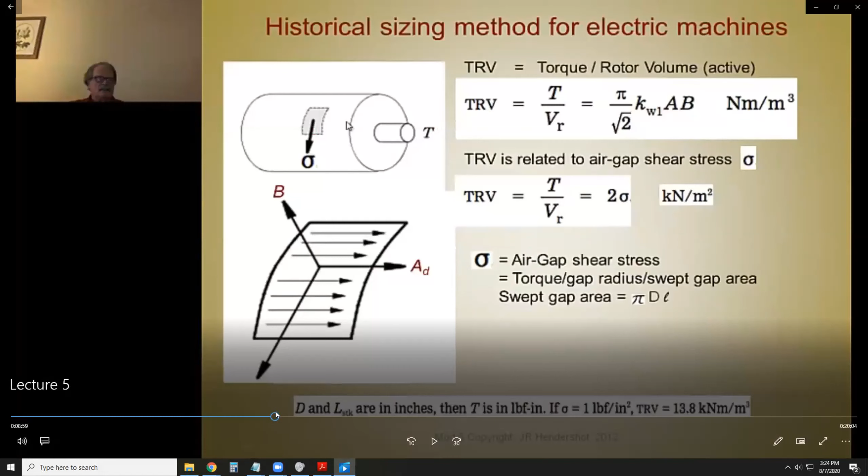Okay, so click yes to my request for you to control my screen, did you see a window that said that? No, I didn't see that. Sorry, that's all right. I guess I'll play this and then you can tell me when to skip. Oh there you go, now you can control it. I can control it now? Yeah, you're moving the mouse. Oh I see, okay.

Anyway, okay, I just wanted to show some examples. This is the first lecture on machine sizing. I'm not going to go over every one of them. I want to get it to change here.

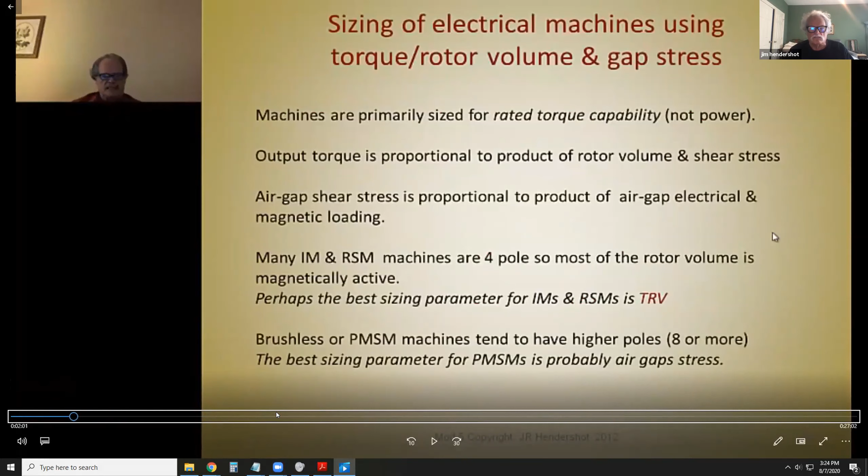Okay, so the electric machines are rated mostly on torque and not on power, to the extent that you've got to know how you're going to cool this machine. So down through the years, for 100 years, there have been certain parameters used as guidelines to size a machine.

One of the originators of this was a professor, M.G. Say, S-A-Y, you can see his reference at the bottom of this slide. He wrote a book called The Performance and Design of AC Machines, London, 1970. But his work goes, that was the last edition, but his work goes way back before 1970.

He promoted that you design machines based on the air gap stress and the torque per volume of the rotor. There's a factor that relates those two values. Air gap stress is figured in pounds per square inch.

If you take the swept air gap diameter of any machine, that's the center of the air gap diameter times pi times the length of the rotor, that gives you the swept area. That's the area where the electrical energy is converted to a force. Then if you divide that into the torque divided by the radius, or the diameter divided by 2, that gives you pounds per square inch, or the air gap stress.

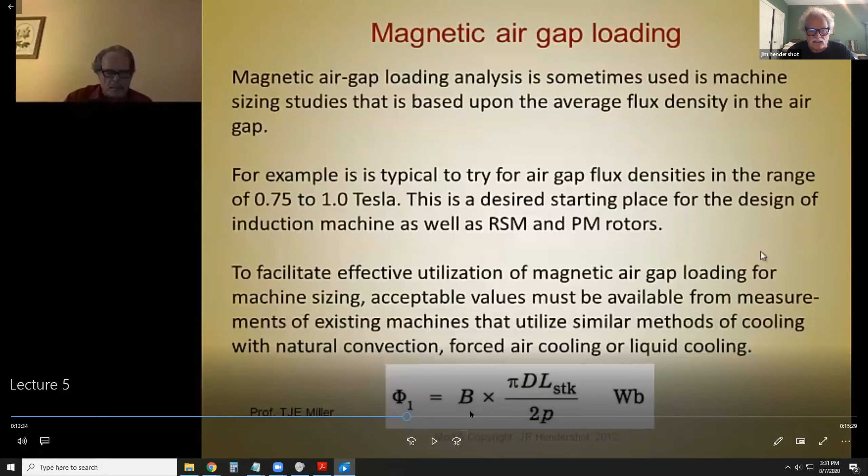Some motors, the rotors go so fast that you have to keep them from flying apart. I've designed and built permanent magnet motors that go 240,000 RPM for the Korean company Hyundai, for their electric turbocharger for their diesel engine. So you have to retain the magnets based on the tip speed.

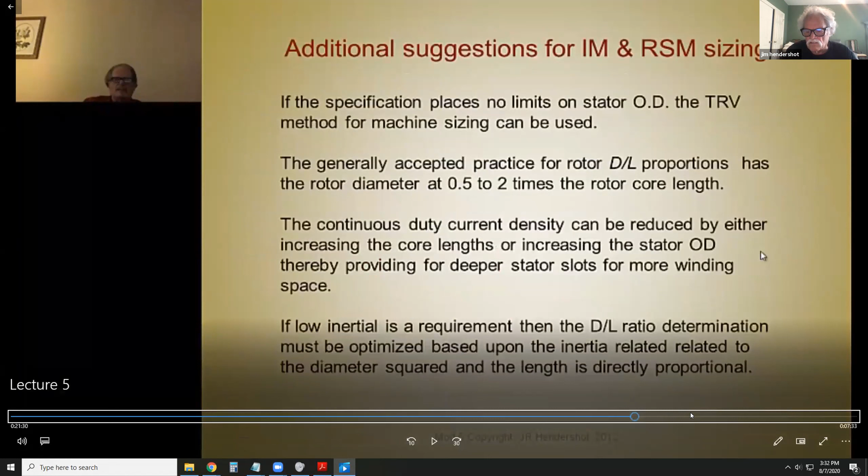So this is an example of the type of lectures these are, that show you how to make the decisions and decide how to go about your design.

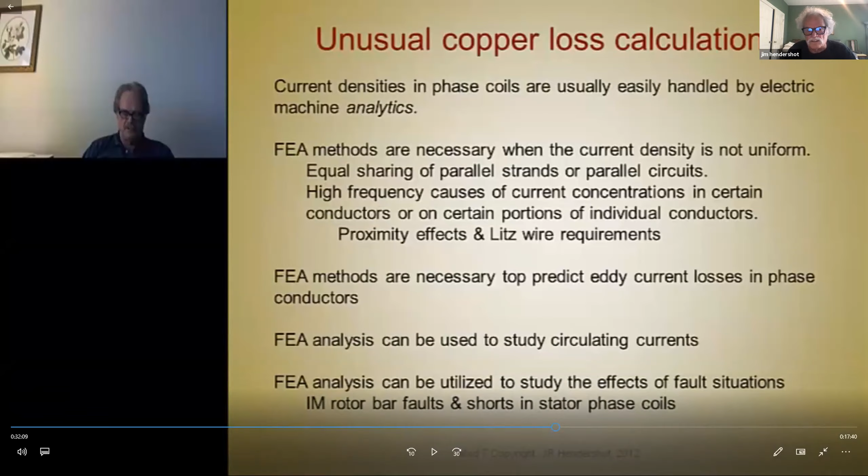Most of them use permanent magnet synchronous motors, AC motors.

The famous electric car company, Tesla, their first motors were induction machines. They were copper rotored—the rotors are made out of copper, not aluminum. Their first 2 or 3 models used induction motors, where everybody else in the world uses PM synchronous motors. And remember, Tesla invented the induction motor, and that car company is named Tesla.

So that might have had something to do with why the owner kept the induction motor as his traction motor. The latest Tesla cars, however, have gone to permanent magnet synchronous AC machines, like most everybody else. For a while there, the cost of magnets was quite high, so there was interest in reluctance machines and even induction machines, and there are some cars now that do use induction machines. I think the latest General Motors electric car uses an induction motor in the front and permanent magnet synchronous in the rear, or vice versa—I don't remember.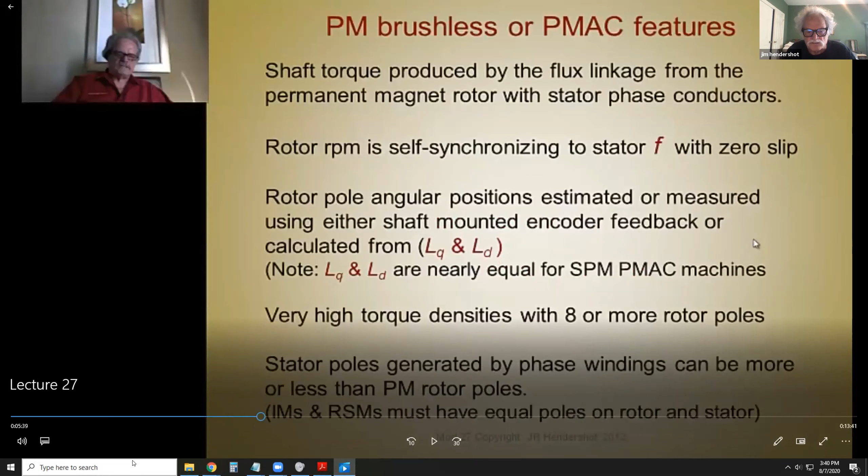So, I've got several lectures here on the PM synchronous machines, which are probably the most common and what most people are going to be involved with, who study these lectures and are destined to become a machine designer.

If you build a progressive die to punch the rotor out first and then punch the stator out, you've got the minimum of wasted steel, which you have to pay for anyway whether you use it or not. Even this requires the use of a square piece of steel to get those round parts out of. So you lose 21% or so of the steel by punching round laminations out of a square piece of steel, even though it's a strip of steel.

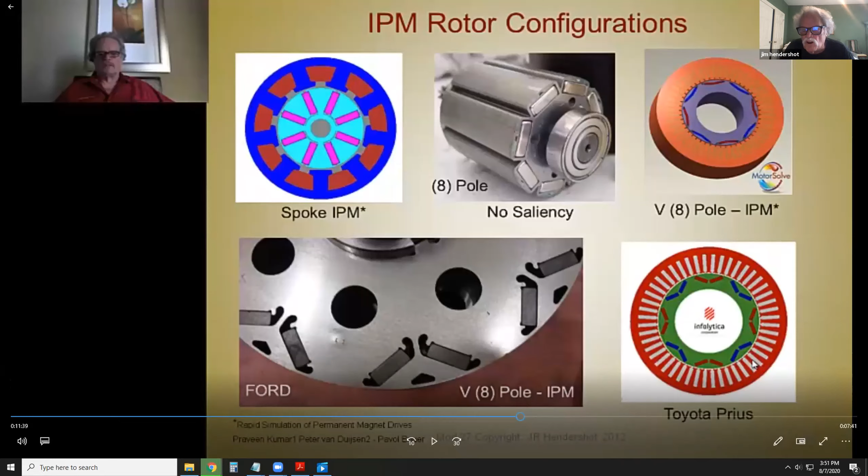So the latest winding technique is known as hairpin windings, where you don't use multiple strands. You use square or rectangular wires formed like a trapezoid, and they're inserted in the slots. That's the newest thing, not really covered in any of these lectures, but I encourage you to look into it, because it has caught on like women's mini skirts, and every traction motor company in the world is doing it. General Motors started it, it was first invented by the old Remy division of General Motors for the Chevy Volt. Then Toyota took a license from General Motors, so theirs is made that way. The BMW i3 is a famous traction motor, high power density, high torque density, the highest to date. They started off with multiple strands per turn with lots of turns, but they've now switched to a hairpin winding.

So that's the latest thing. I encourage you to look that up.

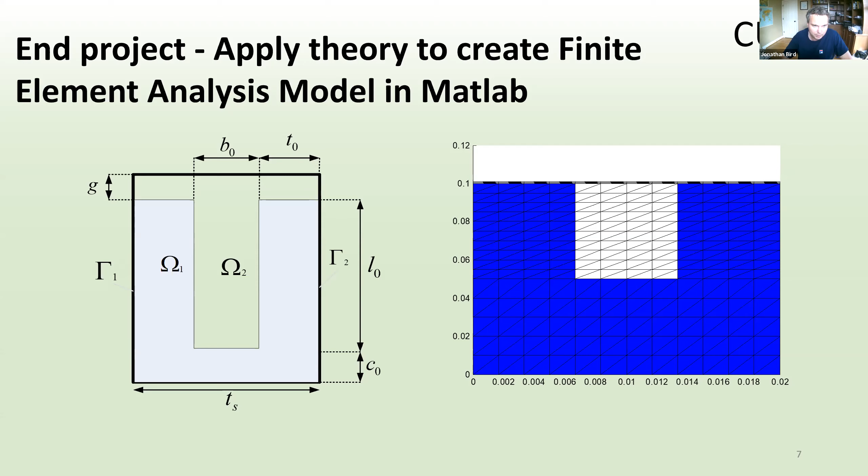I think it's a good project to work on to get a real understanding of how finite element analysis works, and then in MATLAB it can output plots like this showing the vector potential lines.

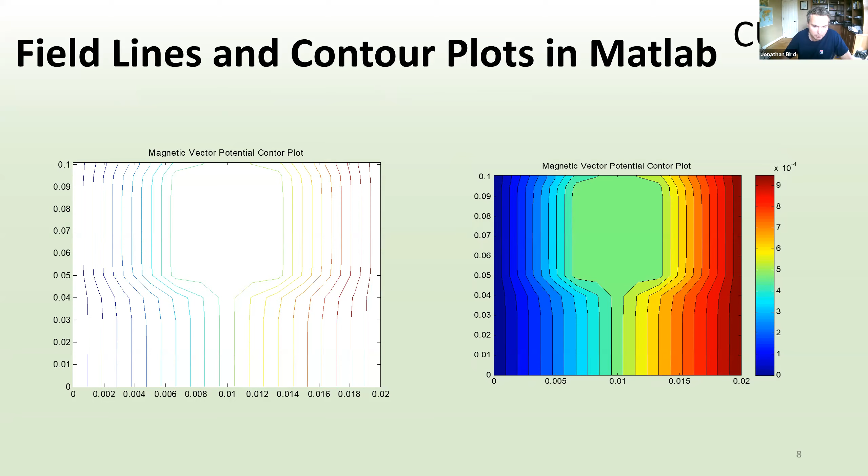Okay, so once I go over some of the theory and you do a practice problem in MATLAB, the second part of the course is on winding analysis and material modeling. In this section I rely on a number of fillable handouts and written notes—the other part is also written notes. I provide these sorts of handouts that should be on the CUSP website. I'm going to be updating the course again next year, but you can use these.

And then through that you can draw up turns functions and winding functions.

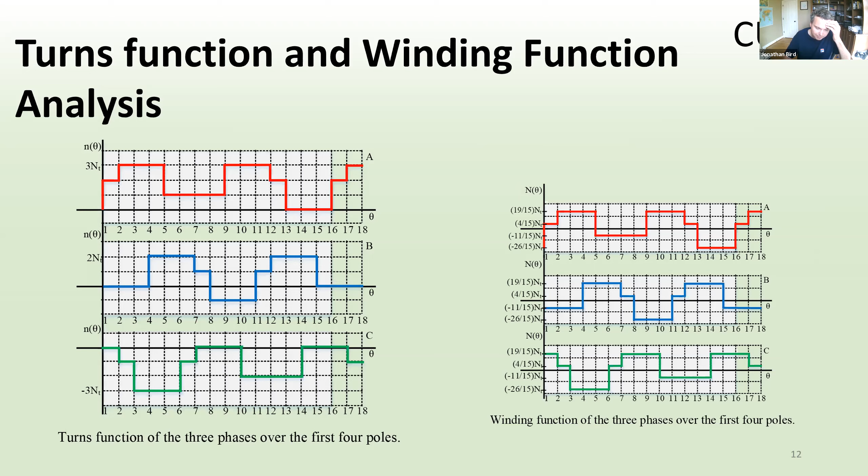These model the locations of the windings in the particular slots. And then from that, you can actually calculate inductance terms and MMF for the case of being linear.

So with this knowledge of how the windings look in a machine, you can then add up the three phases. For example, this is an example with 45 slots, 12 poles. In order to do that, a couple of the slots have to have two slots per pole per phase, and then the others have one slot per pole per phase.

So you get this sort of winding function plot, and you can compare that with the finite element analysis model. This is normalized. Now the finite element model includes the nonlinearities, as I'll briefly talk about.

But the winding function analysis allows you to still extract out the harmonics, as you can see on the left and right. I talk about how to understand these. So you get the 6-pole pairs, which is what we're trying to get, but you also get these other harmonics. Ideally you want to make a stator design that has minimal other harmonics to reduce losses, but there's trade-offs.

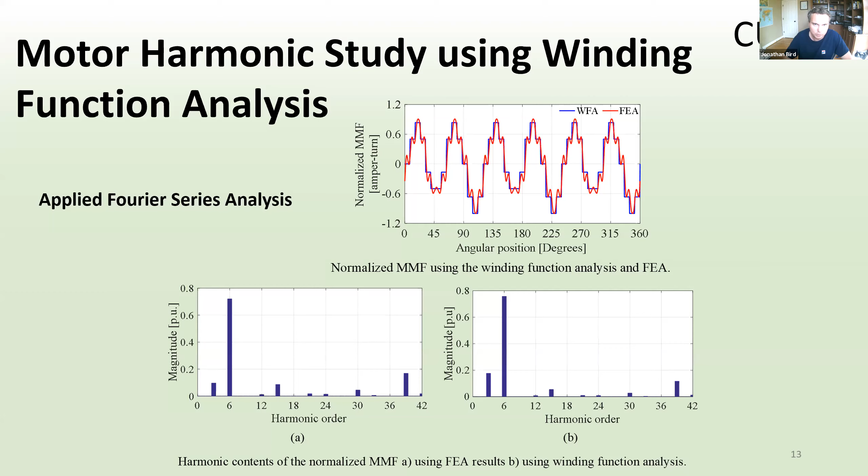So I talk about different windings and how to analyze them. You can see that to get these types of waveforms, you can analyze them using Fourier analysis. And then I relate these back to more traditional winding factors.

So this section covers the turns function, winding function, distributed windings, concentrated windings, fractional slot windings. We talk about the 3 types of windings, and then I didn't show here, but I go into quite a lot of detail on magnet modeling and graphical approach, and then there's eddy currents and core loss.

One very important topic that is not talked about in this is thermal analysis. That's critical for motor design. But a lot of the computer programs allow you to do the thermal analysis after the finite element analysis, and you can iterate back and forth using the finite element analysis. But I didn't talk about the theory behind the thermal analysis modeling, and in this class I don't talk about that.

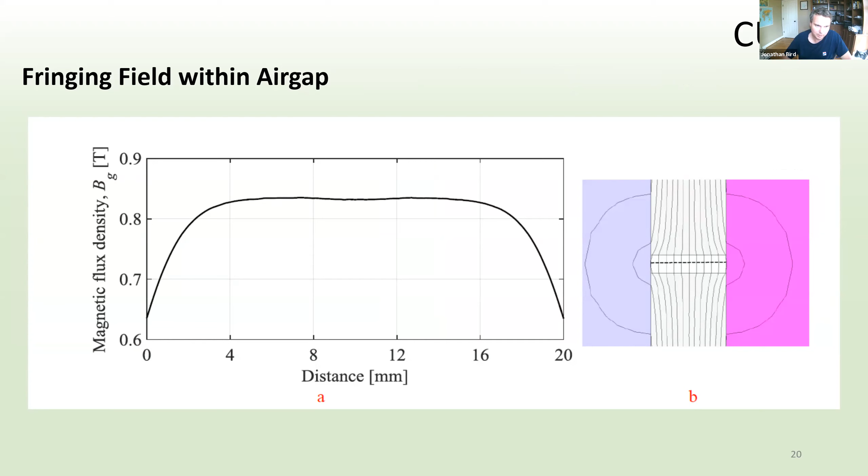Then nonlinearity characteristics can be looked at in class using the finite element program. You enter the BH curve into JMAG or ANSYS or whatever program you have, and then the students can compare the linear and nonlinear models as a function of current.

So it's almost like an experiment, really. It's kind of the best you can almost do these days, but it gives you a way of visualizing and seeing what the real effects are of the nonlinearity.

And then a second example is looking at the magnets. I spend quite a bit of time in the theory section on magnets. This is, I think, one of the simplest magnetic circuits you could study with a magnet in it. But it explains a lot of interesting features because, for example, the winding here allows the flux to flow. In this example, the relative permeability was made infinite—it doesn't really change the results too much—because I get the students to compare with the analytic and the finite element.

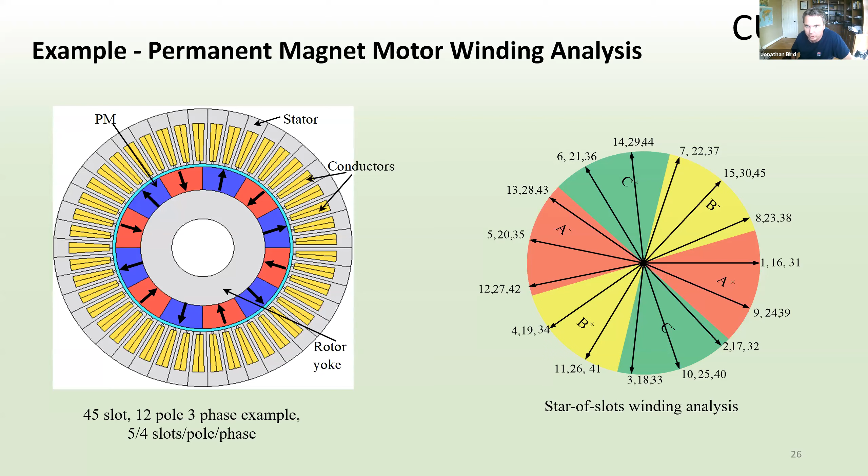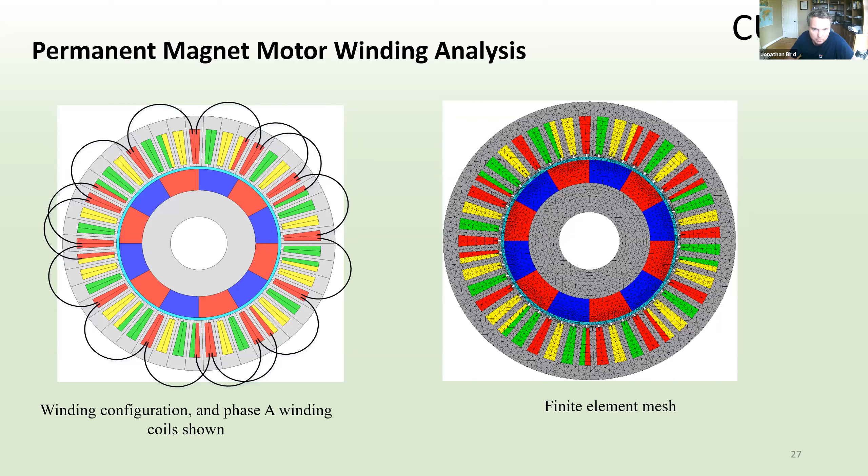I get the students for the class to draw up the star of slots, the winding arrangement, and then you've got the winding configuration, and then you can model it in the finite element mesh, and then you can look at the field. This is with no magnets and only A phase on, so you can check the field is being created correctly.

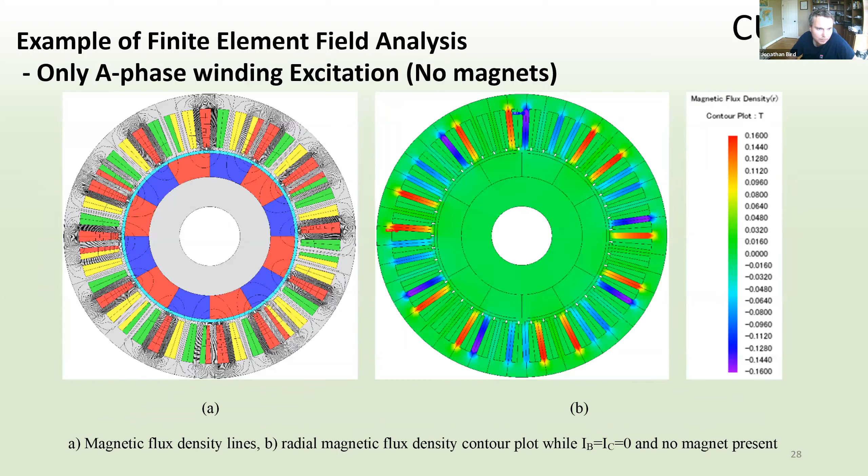And then from the analysis, you can extract out in JMAG or the finite element program, you select the air gap region. And then you can plot the radial flux density, for example, and see it's not all beautifully sinusoidal. In this example, that's because it's from the flux focusing design. So you can extract out the radial field.

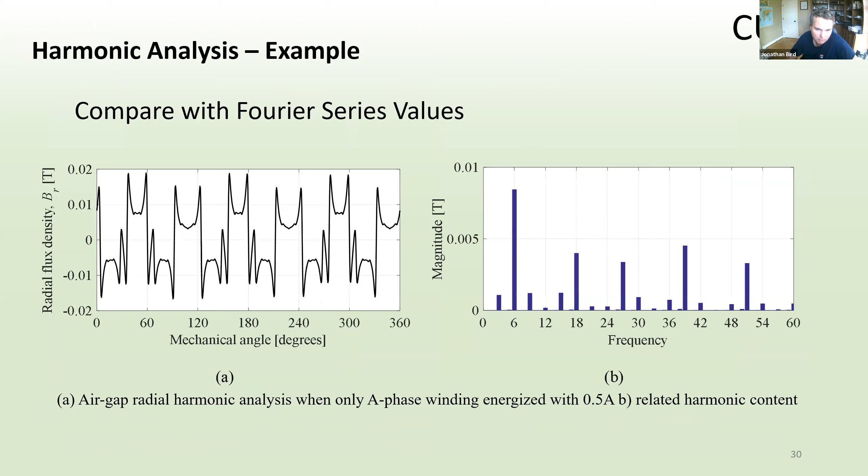So that sort of summarizes the course that's talked about in CUSP. I actually like to write a lot in the notes, so I give out handouts, and then I write the notes out, and then show examples with the computer. But I like to write out notes, not just rely on PowerPoint as I'm doing now.

So it's definitely a graduate level focus, and the course assessment is primarily homework and project based. I use commercial software, and there's free software also, though I haven't actually used the free software since I've got the commercial software for free. Relying on one of those, the students really enjoy it—it's like using a microscope to look inside of a motor. You can really see what's going on and where the flux is saturating, where the field is saturating the material.

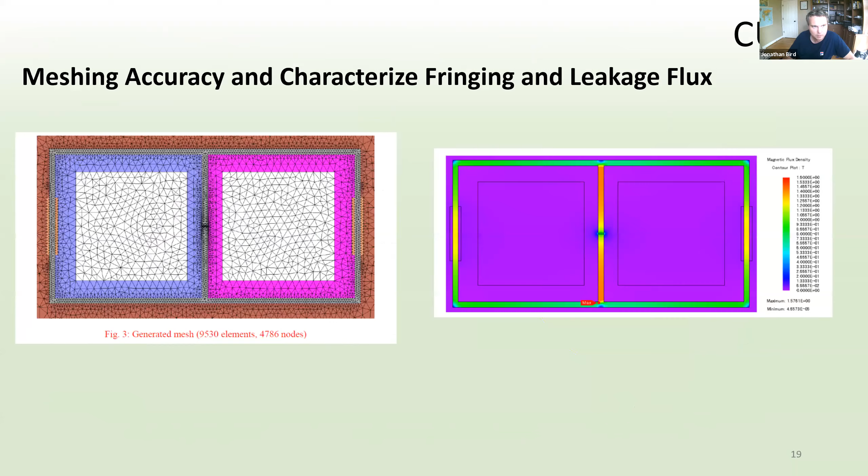Are these codes made available in the course content? I'm not sure what that was referring to. Well, this software is from the vendors, so I've provided the websites, and actually I have contacts with most of these companies—JMAG and ANSYS. I don't want to speak for them, but in my opinion they're all pretty similar. They of course would not say that, but they all sort of do the same kind of modeling, just different ways of doing it. There are some improvements here and there, but that's basically it.

Then there's the free software—FEMM is a free one. The MATLAB code, I actually make the students write themselves to pass the class, so I try not to make the MATLAB code available because you have to write it. MATLAB does have a basic finite element solver in it as well, but if you really want to get into machines, one of these other softwares would be the way to go.

JMAG has been giving me their software for free. ANSYS charges a little bit, and if you're a Mentor Graphics affiliated university you can get Magnet for free, and Flux Altair is usually free too. COMSOL charges a little bit. Yeah, that's all I have on that.